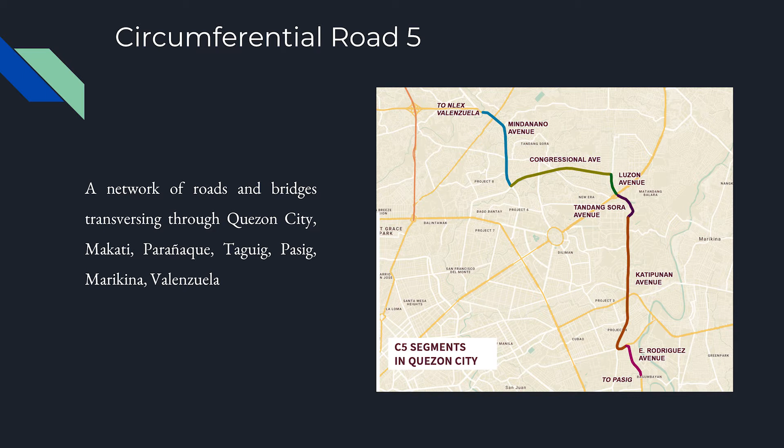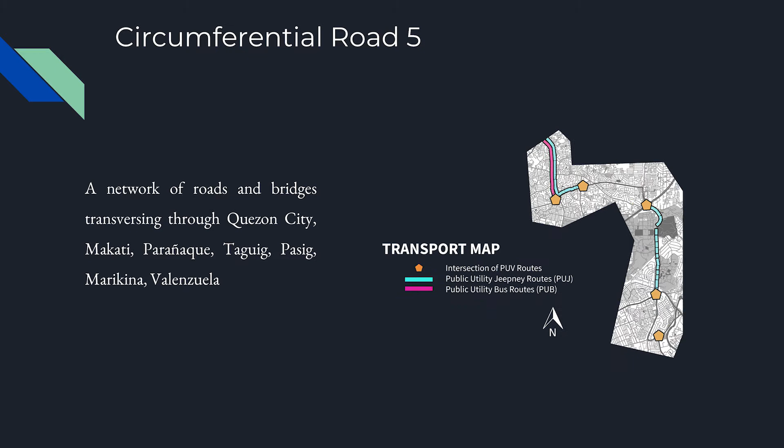C5 pedestrian-oriented project, refocusing the existing urban fabric for pedestrians and commuters. Our chosen site is the Circumferential Road 5, also known as C5. It is a network of roads and bridges that traverses through Quezon City, Makati, Parañaque, Taguig, Pasig, Marikina, and Valenzuela. We are focusing on the Quezon City segment, considering it is the largest among the others.

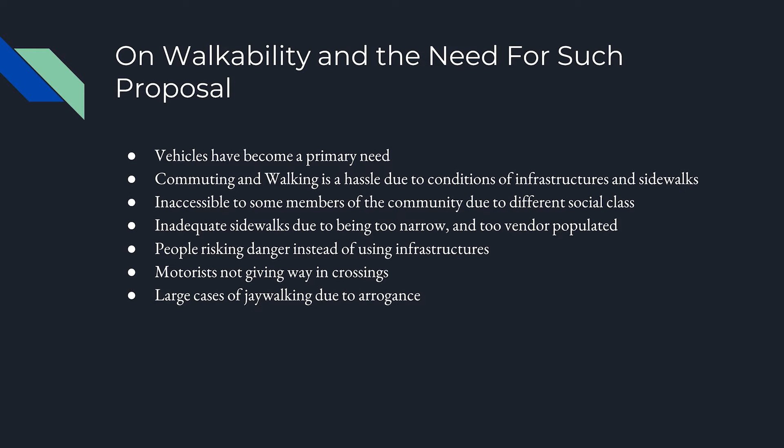So the reason why this proposal is needed is that it highlights the importance of walkability, since it has been overlooked by the priority of finding solutions for traffic issues here in the Philippines. Therefore, the quality of pedestrian infrastructures have been compromised, which will affect the experience and safety of pedestrians that will prompt them to buy vehicles instead. Pedestrians may risk their lives to jaywalk without using infrastructures since they may be inadequate or not safe to use. With walking and commuting seen as a hassle, pedestrians will opt to drive to their destinations instead, which will add and contribute to the traffic problems even more.

For the statement of the problem, the C5 is known as, first of all, one of the worst road stretches. Second, pedestrian structures are made just for the sake of purpose. They're basically just there to not enhance the experience, but just there for the sake of being a function. And it's not even doing that properly. Third, waiting sheds invite informal settlers. This also includes vandalism, and the end users who need to use them, for example at night, aren't able to use them because informal settlers use these areas, such as the sheds, to sleep. Four, large cases of jaywalking. Now, why is this? It's because, like said a while ago, the sidewalks are too narrow, and some are full of obstacles, and our pedestrians can't use them properly.

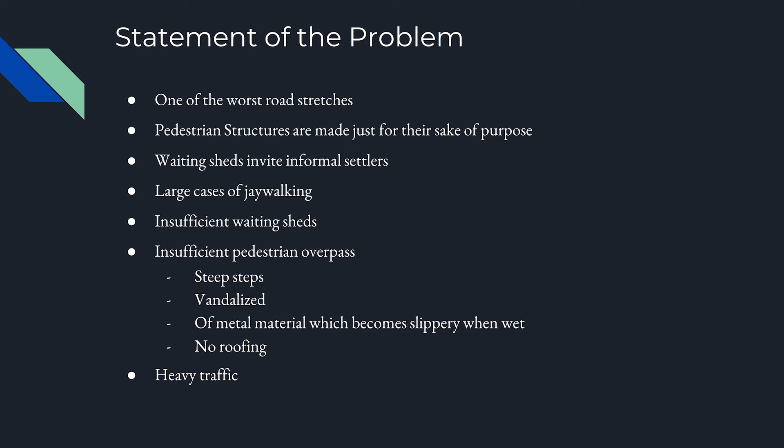Number four and number five, insufficient waiting sheds, and there aren't enough existing pedestrian overpasses. There's a problem. For example, steep steps. They're easily vandalized. They're made of metal materials, which become slippery when wet. This becomes a hazard. And finally, there's no roofing. This can be linked to what was said a while ago. The end users don't see the benefit. What if it rains? The sunlight is too harsh, and the pedestrian overpass doesn't serve its full purpose because of this. And finally, heavy traffic.

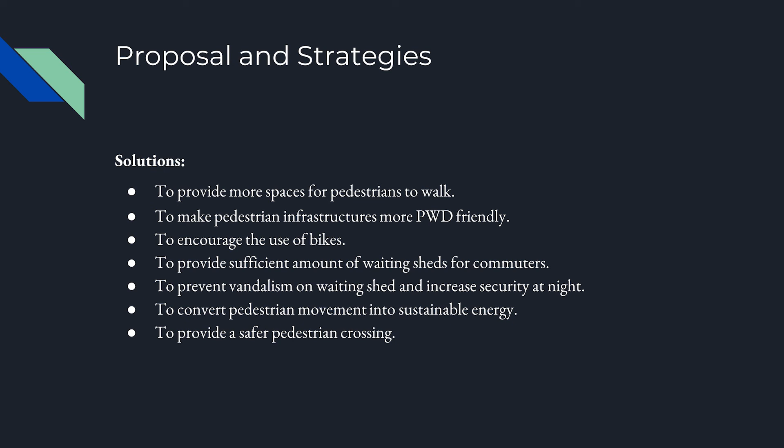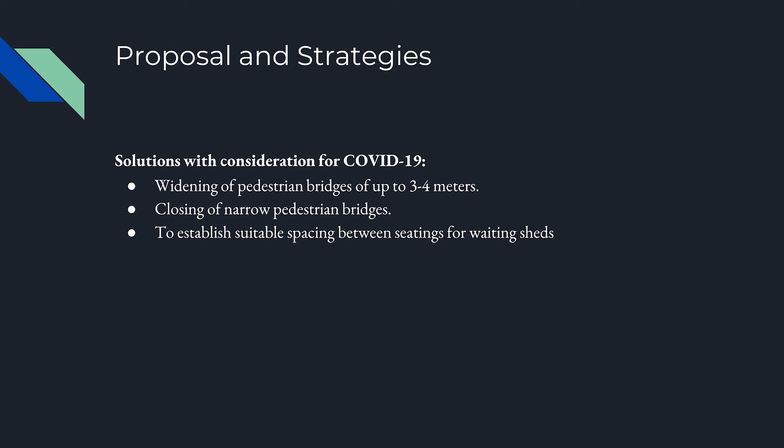Moving on to the proposals and strategies, we have provided seven, and that is to provide more spaces for pedestrians to walk, to make pedestrian infrastructures more PWD friendly, to encourage the use of bikes, to provide sufficient amount of waiting sheds for commuters, to prevent vandalism on waiting sheds and increase security at night, to convert pedestrian movement into sustainable energy, and to provide a safer pedestrian crossing. Proposal and strategies. Following the current guidelines and possible modification in the current health protocols, these solutions are made, such as widening of pedestrian bridges up to 3 to 4 meters, closing of narrow pedestrian bridges, and to establish suitable spacing between seating of waiting sheds.

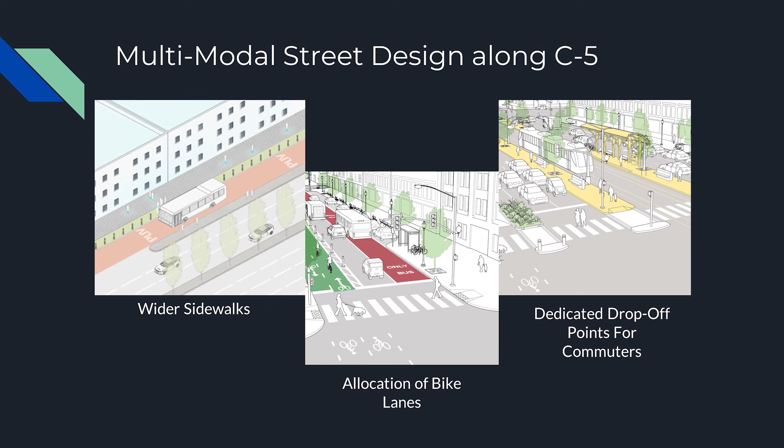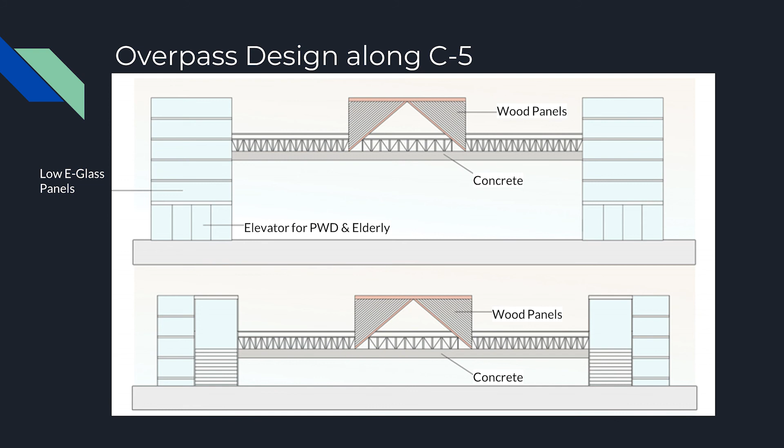So the following images are the strategies of multimodal street design, which includes wider sidewalks for better visibility and social distancing, allocation of bike lanes to encourage alternative modes of transportation, and lastly, dedicated drop-off points for commuters and deliveries. So this is our overpass design along C5. In the normal designs of the overpass that we have looked at throughout C5, since the lanes of the overpass are small for the pedestrians to cross, we have increased the length of the lanes for more pedestrians to cross and had bike lanes to encourage people with bikes crossing the street to bring their bikes to the other side of the road. In addition, to avoid informal settlers and other people from loitering on the overpass, we have provided segmented routes.

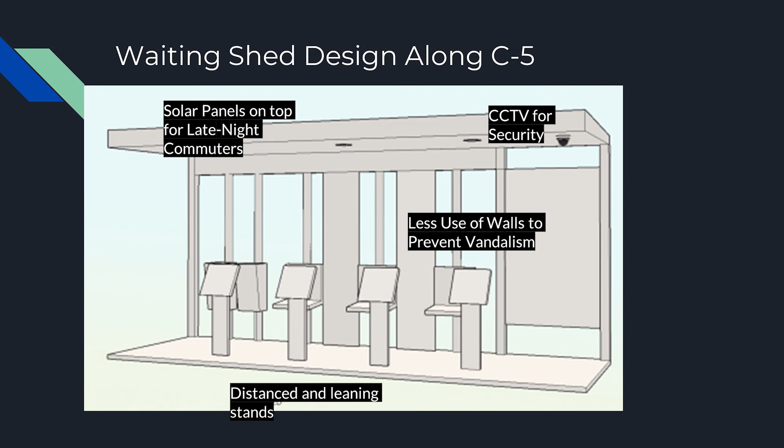The proposal for the waiting shed gives more emphasis on preventing vandalism and loitering. Less walls are used to give less chances for spray painting and such. Instead of benches, the shed makes use of leaning stands for commuters to lean on and slightly tilted single seats to make sure it is not used for a long time. The seats are also far apart from each other for social distancing. The waiting shed also includes a digital map for information, lights for late night commute, and CCTV camera for security, which are all powered up by solar panels installed on the roof of the shed.

Other strategies include kinetic tiles and laser-aided crosswalks. Kinetic tiles are tiles installed along sidewalks and surfaces where people walk onto and converts the energy of their movement into sustainable energy to power up structures and street infrastructure along C5, which will have less impact on the environment. The laser-aided crosswalks will make crossing the street safer by using a laser system that creates projections on the ground that act as visual aid to both crossers and drivers, giving them a prominent signal on when to cross or when to stop.